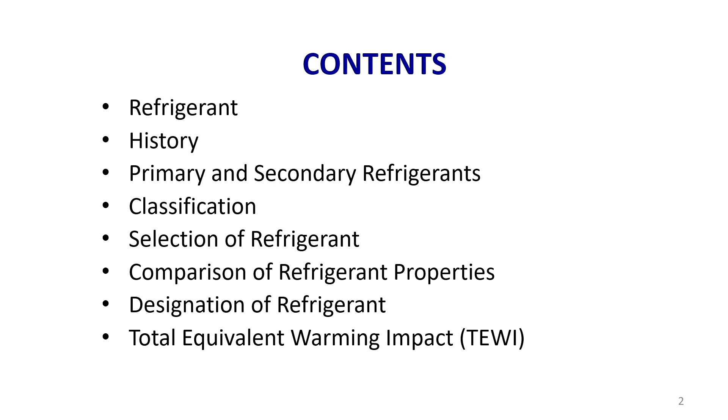So, first of all, what is a refrigerant? Refrigerant is the working fluid which is employed in a refrigeration or an air conditioning system. It can be a single substance or a mixture of substances.

If we take the vapor compression system and the vapor absorption system, in case of vapor compression system, the refrigerants which belong to CFC, chlorofluorocarbon, or hydrochlorofluorocarbon, HCFC, or HFC, most of these refrigerants are single substance. It is not a mixture, it is not a combination of two or more refrigerants. Of course, refrigerants belonging to azeotropic mixture or zeotropic mixture are not a single substance; they contain two or more refrigerants. So those refrigerants are in mixture form.

In case of absorption system, we have seen two systems, both are environment friendly. Water lithium bromide system: water is the refrigerant, lithium bromide is the absorbent. The combination is called a solution. It is called working fluid pair, I mean two working fluids, one is refrigerant, another one is absorbent. And in case of ammonia water system, ammonia is the refrigerant and water is the absorbent.

And this refrigerant is a substance which absorbs the heat in the evaporator, undergoes phase change, where the liquid refrigerant is converted into vapor refrigerant, low pressure refrigerant vapor, and again the refrigerant undergoes phase change in the condenser, where the vapor form of refrigerant is condensed into liquid form.

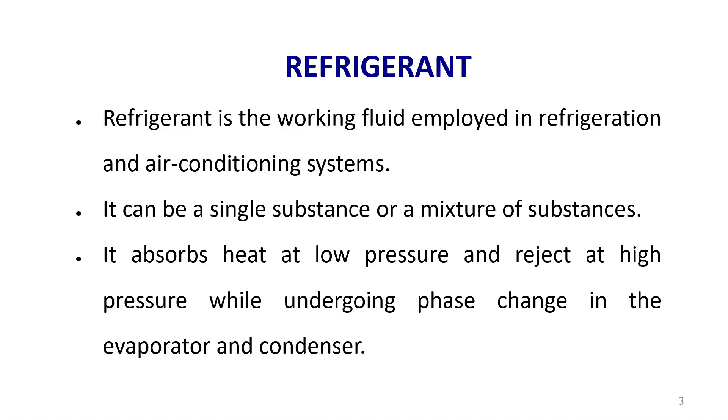These refrigerants are selected based on the thermodynamic properties. This point will be repeated in a subsequent slide, since it is very important. So, I have given it in the introduction of the refrigerant as well as under the heading selection of refrigerant. Normally, when we design the system, the cost, the operating cost, the initial cost, the reliability of the system, how easy it is to service if any maintenance of the system is required, all these things depend upon the nature and the type of refrigerant employed in the particular system.

Let me repeat it again. The design of the system, the size of the system, the reliability, cost, initial cost, operating cost, the maintenance cost, and the extent to which it can be easily serviced when any maintenance work is required, all these things depend upon the type of refrigerant employed in the system. So, as I mentioned, the system design cost depends upon the selection of refrigerant.

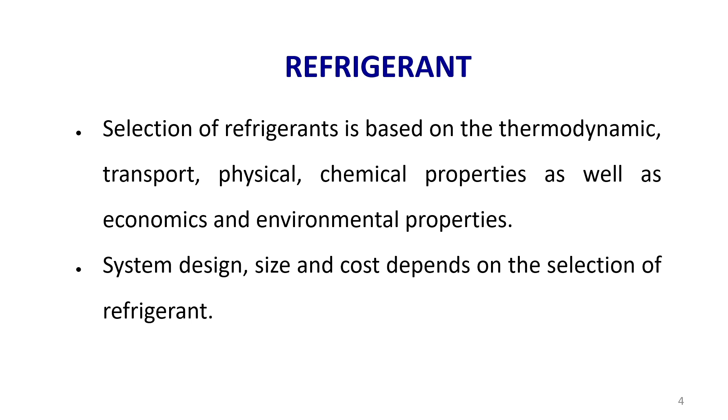This table highlights a brief history of refrigeration. If we go into the detail, it will take more time, so due to time constraint, I have just summarized the inferences from the history of refrigeration in the form of a table. In the year 1755, William Cullen designed the first refrigeration machine. About 50 years later, Oliver Evans described the vapor compression system, VCS, to produce ice by using ether.

Then in the year 1834, Jacob Perkins developed the first vapor compression refrigeration system. In 1850, Alexander Twining patented the vapor compression system employing ethyl ether as the working fluid. Then in 1856, James Harrison patented vapor compression system using ether, alcohol and ammonia. So, ammonia is the natural refrigerant which was used at that time.

In 1860, Ferdinand Carre patented the vapor absorption system. The first absorption system was patented using ammonia water, in which ammonia was used as the refrigerant and water as the absorbent. 1879, first refrigeration system using R744, that is CO2. 1928, General Motors developed the refrigerant R21. 1931, commercial production of R11 and R12, refrigerants belonging to the CFC, chlorofluorocarbon, group, by General Motors and DuPont.

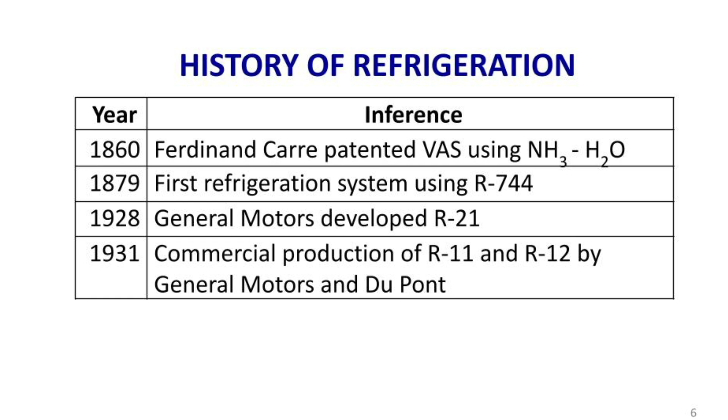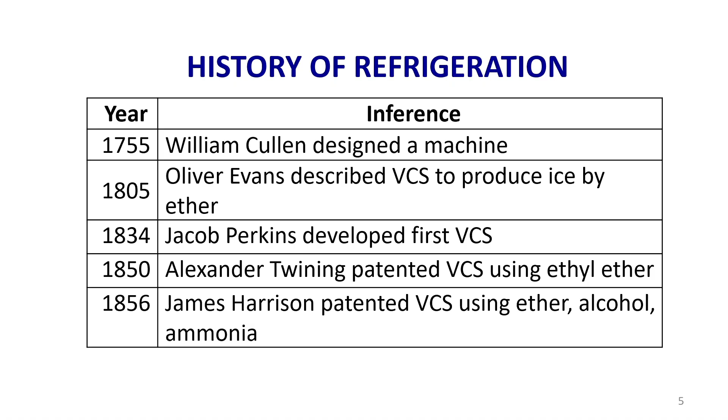So, this is a brief history. The history of refrigeration started way back in the year 1755 and a lot of developments have taken place. Maybe some of the systems were not that efficient, though the design was successful. When they evaluated the performance, it was not up to the mark, so the design has been modified. The eminent scientists who worked in the subsequent years modified the design and proved some of the systems to be successful in reality also. So, the history goes from 1755 onwards.

Difference between primary refrigerant and secondary refrigerant. So, the primary refrigerant is used directly in the system. It is called a direct expansion system, DX system, where the refrigerant is directly used and also it undergoes phase change in the evaporator as well as in the condenser.

Examples of primary refrigerants are R11, R12, R22, R134A, R407C, propane, ammonia, sulfur dioxide, carbon dioxide. When it comes to secondary refrigerant, these refrigerants are not used for cooling directly. They are used to transport the energy from one place to another place.

Like the refrigerant will be used to cool the water. The chilled water will be circulated and used to cool the air. That means here the refrigerant is not directly cooling the air. The refrigerant is cooling the medium water, which in turn is used to cool the air. And secondary refrigerants do not undergo phase change either in the evaporator or in the condenser.

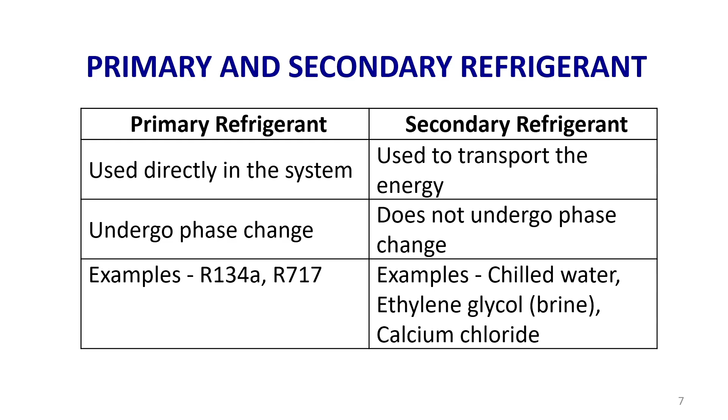So, in such cases they will use some salt like calcium chloride, available in salt form, or ethylene glycol. Some antifreeze agents will be used with the medium. So, the previous classification is based on whether it provides the cooling directly or indirectly, and whether it undergoes phase change or not.

This table shows the classification of refrigerants according to their properties, whether they are environment friendly, thermophysical properties, molecular structure, etc. Under pure fluid, there are two types of refrigerants: synthetic and natural. Synthetic refrigerants are artificial, in other words, man-made refrigerants.

CFC, chlorofluorocarbon, HCFC, hydrochlorofluorocarbon, HFC, HFO, all these categories fall under synthetic refrigerants, created by man. Example for CFC is R11, R12; HCFC, R22 and R123; HFC, R134A, R404A; and HFO, HFO1234YF and HFO1234ZE. These refrigerants, especially the HFO based ones, have very low boiling point.

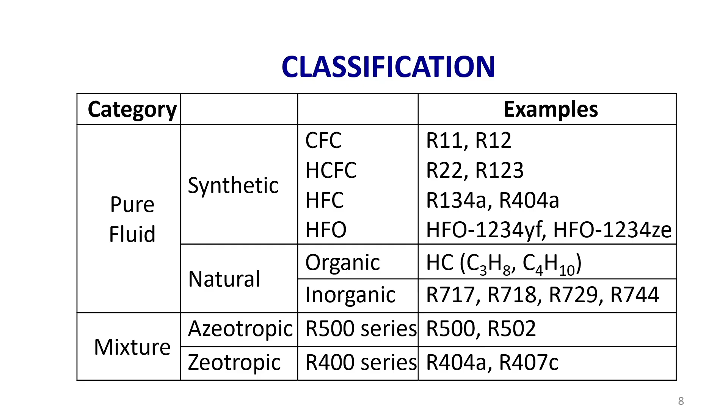The difference between azeotropic and zeotropic is, in an azeotropic mixture the composition does not vary between the liquid and vapor state, so the refrigerant behaves like a pure fluid, whereas in a zeotropic mixture there is a variation in composition between the liquid and vapor state. Since it is very important, I have mentioned these points again, though it is repeated.

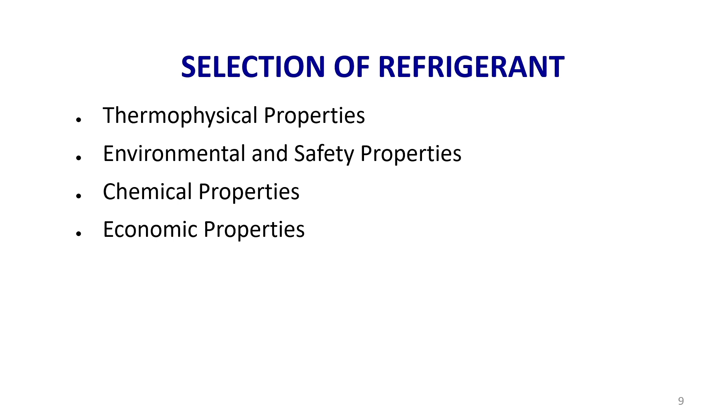Selection of refrigerant is based on 4 different properties. First, thermodynamic and thermophysical properties. Second, environmental and safety properties. Third, chemical properties, and fourth, economic properties. These are the criteria based on which a particular refrigerant is selected. Let us see the properties in detail one by one.

Thermophysical properties. The first and foremost one a refrigerant should possess is high evaporator pressure. When I say high evaporator pressure, it should be positive, meaning the pressure should be more than the atmospheric pressure.

So, that means here P, the evaporator pressure, should be more than the atmospheric pressure. So, what is the advantage when we have a positive pressure in the evaporator? Suppose the pressure in the evaporator is less than the atmospheric, okay, negative pressure is there. Then obviously air will be entering into the evaporator due to the pressure difference, and moisture content in the air also will be getting into the system.

And once these things get into the system, removing them is not an easy one. Making an overhaul of the system is time consuming, and also it is a tedious process. So, rather than maintaining a lower pressure than the ambient in the evaporator, it is always recommended to have a positive pressure more than the ambient, and also the advantage of having a high evaporator pressure or

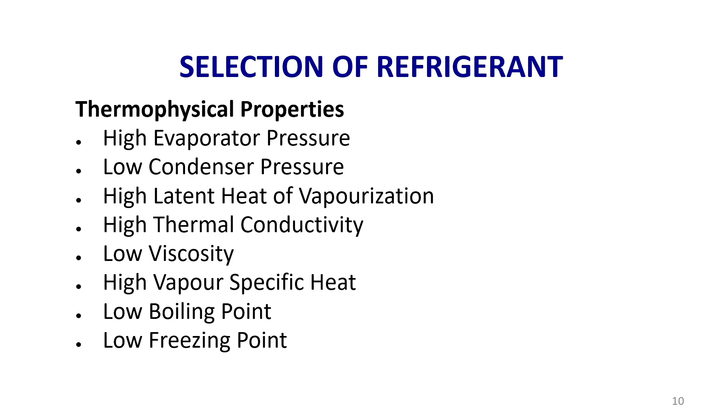Coming to the environmental and safety properties. The refrigerant is expected to be non-flammable and non-toxic. Of course, in the example I took, ammonia and water, water is a non-toxic substance whereas ammonia is a toxic substance. That is one reason why people fear using ammonia. So the refrigerant should be non-toxic, non-flammable, non-corrosive. When I say non-corrosive, the refrigerant should be compatible with the materials.

Let us take the same example of ammonia. Ammonia is not compatible with copper. So, even for the solution pump used in an ammonia water system, we cannot use any type of pump, because the motor windings are made of copper. If the refrigerant gets mixed with those windings, and the pump is not specially designed for pumping the ammonia water solution, the refrigerant, not being compatible with copper, completely corrodes the material. So, the refrigerant we select should be a non-corrosive one.

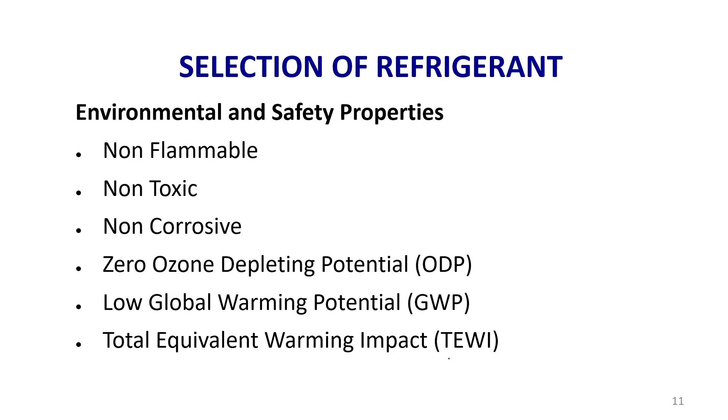TEWI, total equivalent warming impact. GWP and these are calculated based on CO2 emission. In total equivalent warming impact, the CO2 emission is counted both directly as well as indirectly. That is the difference between GWP and TEWI: TEWI takes into account direct emission as well as indirect emission. I will explain that in the last but one slide with an example.

Chemical properties. The refrigerant that has been selected should not react chemically; there should not be any chemical reaction. It should be chemically stable. It should mix well with the lubricating oil. So either it should be miscible with the oil completely, but there should not be a case where the refrigerant and the lubricating oil mix partially, partially mixing and partially not mixing.

Handling those things is a little bit challenging, and the refrigerant should be detectable. If there is any leakage, we should be able to detect it easily. For example, though ammonia has a drawback of toxic nature, because of its smell, if there is any leakage of ammonia it can be easily detected. Whereas for some refrigerants which do not have a toxic nature, leak detecting devices are available by which the leakage can be identified from the system.

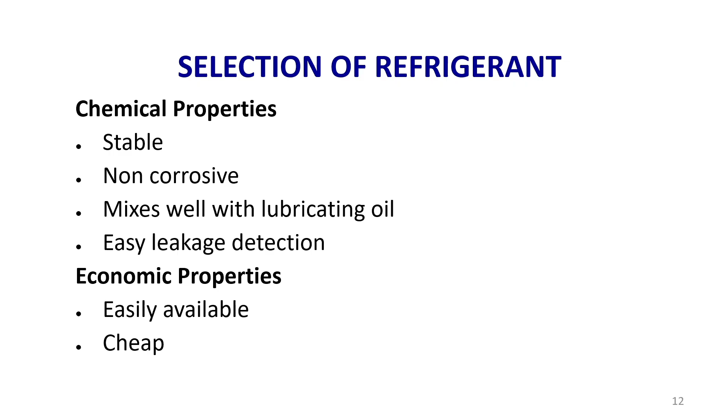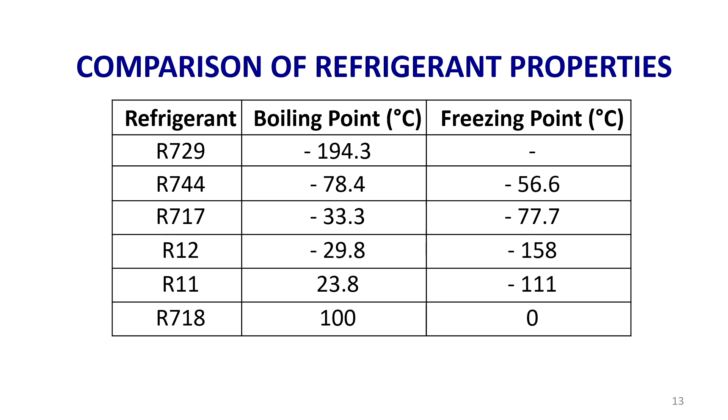When we select the refrigerant, the ODP should be 0, not even in terms of decimals. GWP can be small. Again, when we say small, 1800 is not a small value; a GWP of 100 or 50 could be considered small. 500, 1000, 5,000, 10,000, those values are not small.

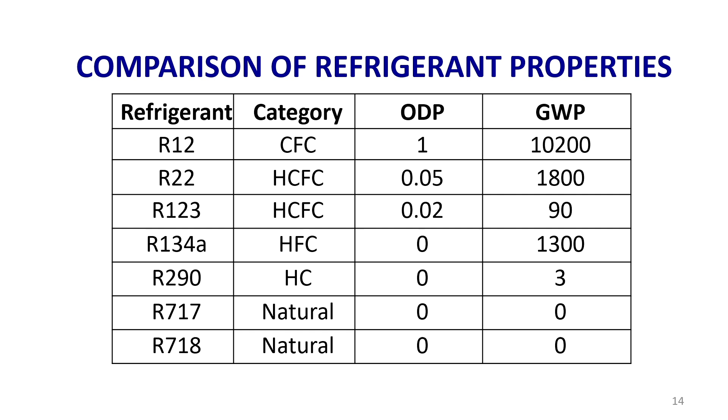If you see the hydrocarbon refrigerant R290 propane, it has got excellent ODP and GWP. ODP is 0 and GWP is 3. So, from the environmental perspective, it has got excellent properties, but there is one drawback because of its flammability. So, its usage is limited, or minimized.

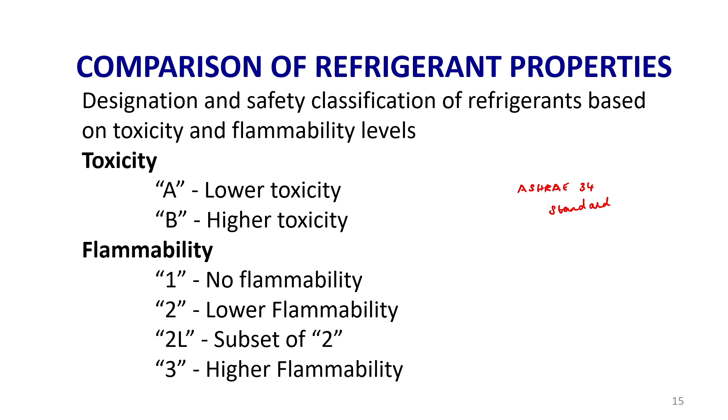But the disadvantage of using carbon dioxide refrigerant R744, where 744 reflects the molecular weight of CO2, is that its critical temperature is 31.1 degree centigrade. So, there is a cycle called transcritical cycle which is employed. Normally, the condensation process is replaced by a cooling process, gas cooling process.

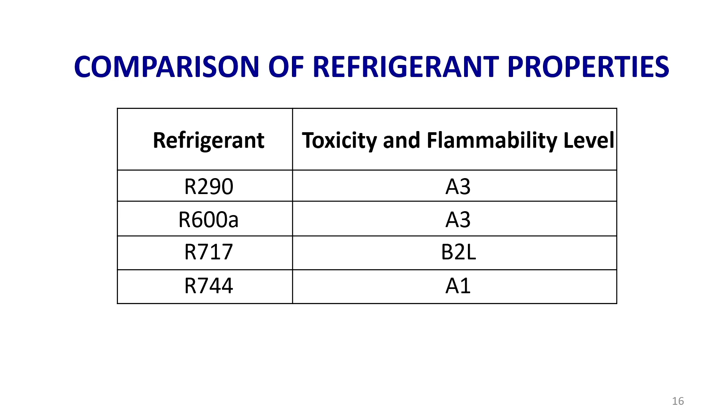Designation of refrigerant. Saturated halogen compounds, refrigerants which fall in this category. What do you mean by halogen compounds? Compounds which contain fluorine, chlorine, bromine are called halogen compounds. These compounds are derived from alkanes which have a formula CnH2n+2. Suppose if I substitute n equal to 1, it becomes CH4, which is nothing but methane. n equal to 2, it becomes C2H6, like that.

So, these compounds are derived from alkanes, and these refrigerants are designated as R, where R represents refrigerant, X, Y, Z. What is this X, Y, Z? X plus 1 is the number of carbon atoms, Y minus 1 is the number of hydrogen atoms, Z represents the number of fluorine atoms. And if there is any balance, the balance represents the chlorine atoms.

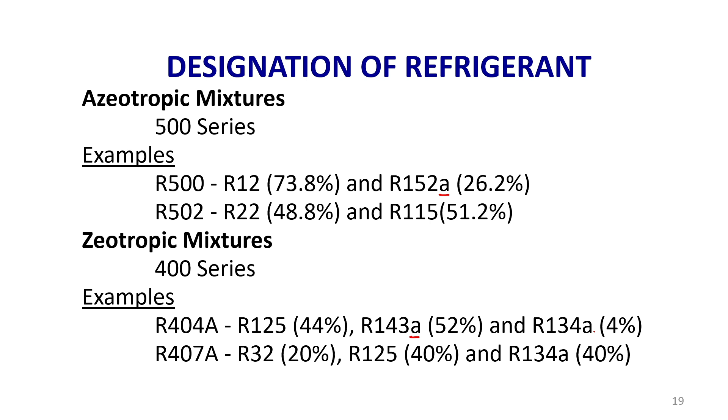Propane C3H8 is R290. Here also this is represented by R followed by the number. For propane alone we can find out the designation by using the previous one: X plus 1 represents the number of carbon atoms, Y minus 1 hydrogen atoms, then Z represents the fluorine atoms. If you apply that concept, we will get 290.

However, for butane and isobutane, that concept cannot be used. So, butane is R600 and isobutane is an isomer of butane. So, it has been given the designation R600A.

Unsaturated hydrocarbon. All the unsaturated hydrocarbon refrigerants are designated by the letter R followed by the number 1. So, you will find R1 means unsaturated hydrocarbon. Then R1150, R1270. Here x is equal to 1, y is equal to 5, z equal to 0. So, you can apply that equation and derive the formula. Due to time constraint I am not doing that one.

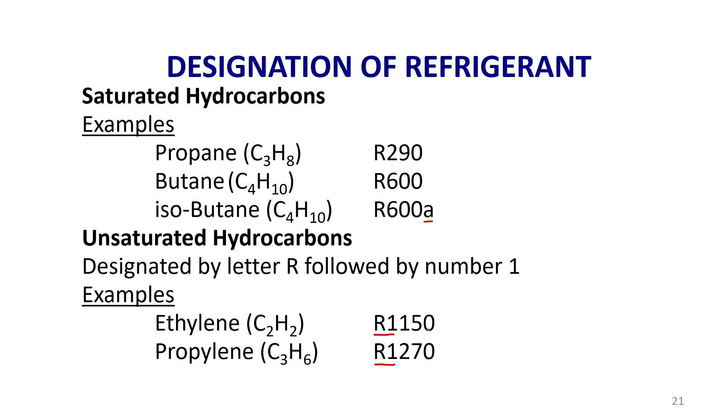So, how to calculate the total equivalent warming impact? This also should be as low as possible. There are primarily 3 important environmental factors considered while selecting the refrigerant. ODP should be 0, global warming potential should be as small as possible, not in hundreds or thousands, and a total equivalent warming impact.

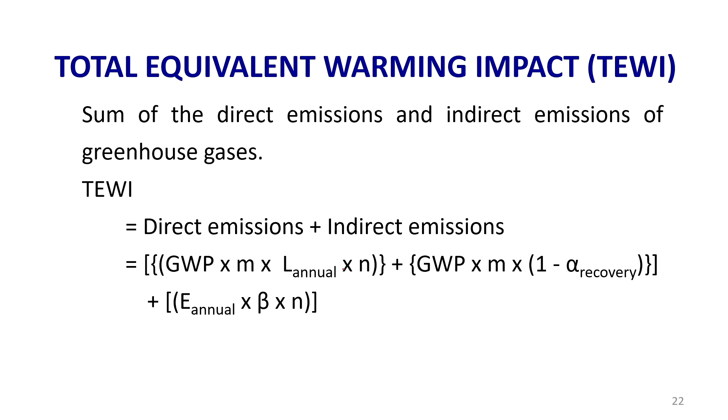The difference between GWP and this one is, as I said before, it takes into account the direct emission as well as indirect emission. You can see direct emission plus indirect emission. This is the formula for direct emission, global warming potential into M into L. I have given the explanation in the subsequent slide. The GWP of CO2 is always taken as 1 as the reference value, based on which the GWP of the others is determined.

L annual is the leakage rate of the refrigerant in a year, in kilograms. Small n is the system operating life in years. M is the refrigerant charge, how much quantity of refrigerant is charged into the system in kg. Alpha recovery is the recovery or recycling factor, which varies from 0 to 1. E annual is the energy consumption, the power consumed by the compressor in units of electricity, kilowatt hour. And beta is the indirect emission factor, in kg of carbon dioxide per kilowatt hour of electricity.

So, this is one example which I have taken, calculation of total equivalent warming impact. The refrigerant selected is R410A. The type of system is multi-inverter 5-star, energy efficiency ratio 3.3. The cooling capacity of the system is 12.5 kilowatt. 1 ton of refrigeration is approximately 3.5 kilowatt, so if you divide this value by 3.5, we will get tons of refrigeration, TR.

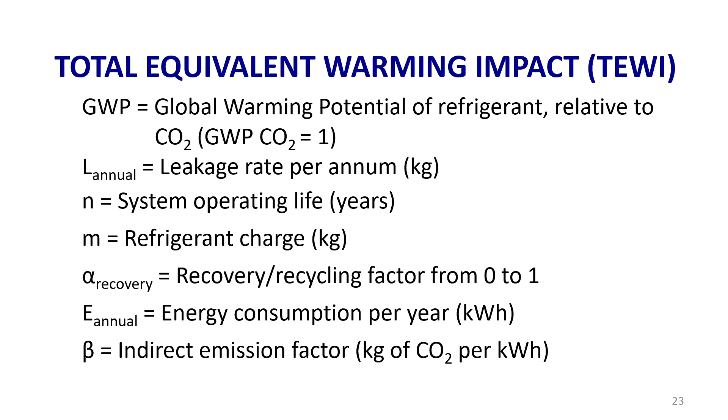Global warming potential of this refrigerant is 2088. I have taken the lifespan as 10 years. All these values, L annual, all these data, are like a case study, the actual data. It is not a simulated one. Beta, E annual, all the explanations I have given.

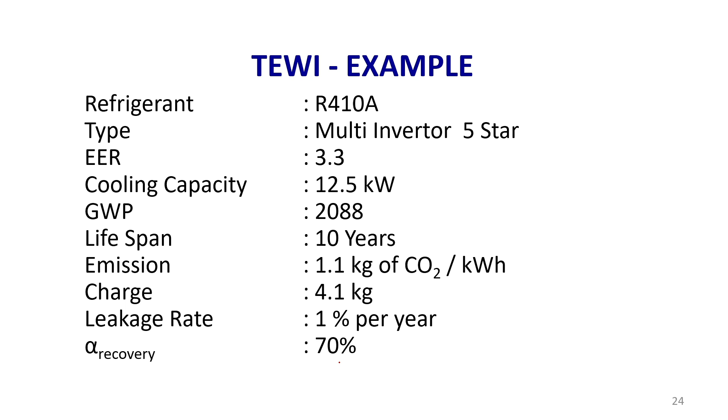So, for the example we are calculating the direct emission and indirect emission. These are all the data available: lifespan 10 years, emission 1.1 kg of carbon dioxide per kilowatt hour, M, leakage rate 1% per year, recovery or recycling 70%. So, you can calculate the annual energy consumption. This is 3.59 kilowatt, assuming the system is run for 8 hours a day for 300 days in a year. So, you will get the kilowatt hours per year.

Direct emission, again I am using the same formula: GWP value is given, M is given, L annual is given, n is given, n is the life period. Please refer the previous slide. Lifespan is 10 years, GWP value is given, leakage rate is given. All the values are given. So, we just have to substitute in this formula, GWP into M into 1 minus alpha recovery.

So, alpha recovery is 70%, that is 1 minus 70%, 1 minus 0.7 is 0.3. So, that is what I have written here directly after substituting. So, 11,129 kg of carbon dioxide is released.

This is direct emission. Indirect emission: the formula is E annual, the annual energy consumption, into kg of carbon dioxide released for 1 kilowatt hour. So, this is a standard value 1.1, multiplied by the life number of years, 10. So, it comes close to 95,000 kg of carbon dioxide. This is 11,000, this is close to 95.

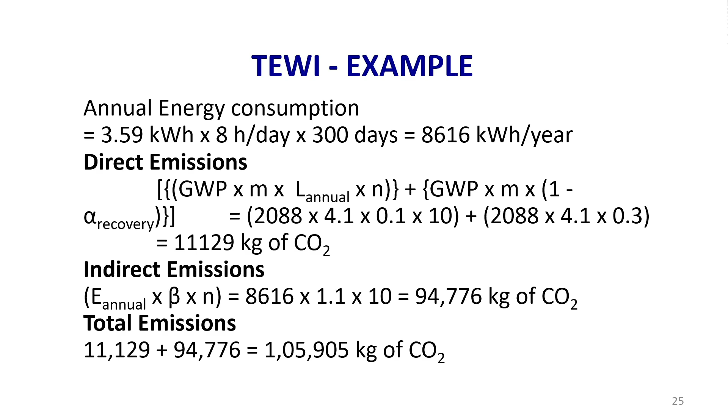So, let me conclude this one. In this lecture, we have seen what is a refrigerant, what is the difference between primary and secondary refrigerant, how the refrigerants are classified, the broad classification like pure fluid and mixture. In pure fluid, we have refrigerants belonging to halogen: CFC, HCFC, HFC and HFO. Then we have got inorganic refrigerants which come under the natural category.

Then we have hydrocarbon based refrigerants whose ODP and GWP properties are very good, in fact excellent. Then we have seen azeotropic mixture and zeotropic mixture. The difference between the mixture and the other category of refrigerant is, in case of zeotropic or azeotropic mixture, a minimum of 2 refrigerants are used. We have seen examples where there is a combination of 3 different types of refrigerants.

Then we have compared the ODP and GWP of some of the refrigerants, and the boiling point and freezing point of some of the refrigerants. Refrigerants are selected based on 4 properties: thermophysical and thermodynamic properties, chemical properties, environmental and safety properties, and economic properties. Finally, we have seen a sample calculation of total equivalent warming impact. So these 3 environmental properties are very important: ODP, GWP and TEWI.